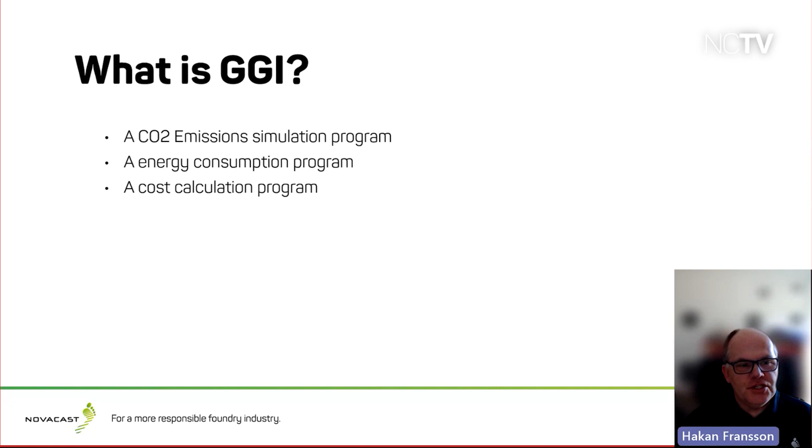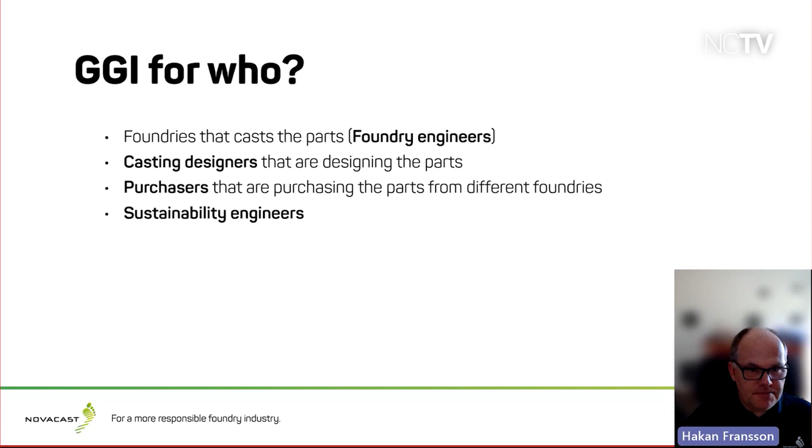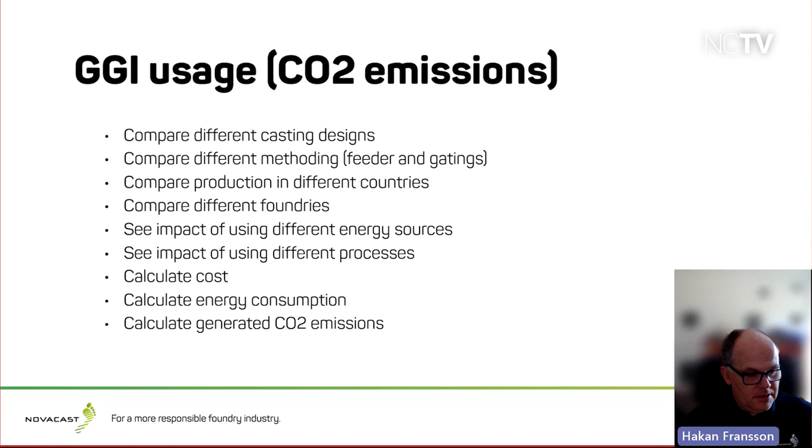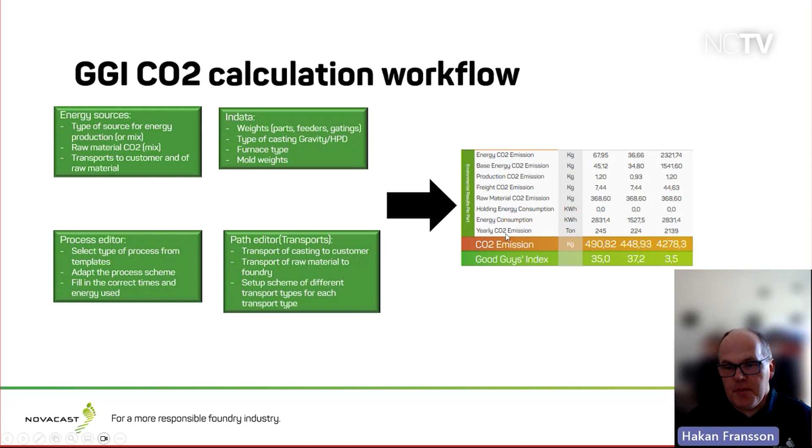And here you have then what comes out - this is the result, in short. You get out the energy CO2 emissions, you get out the energy consumption, and you get the summarized CO2 emissions, and then you can start comparing different types of foundries and so on.

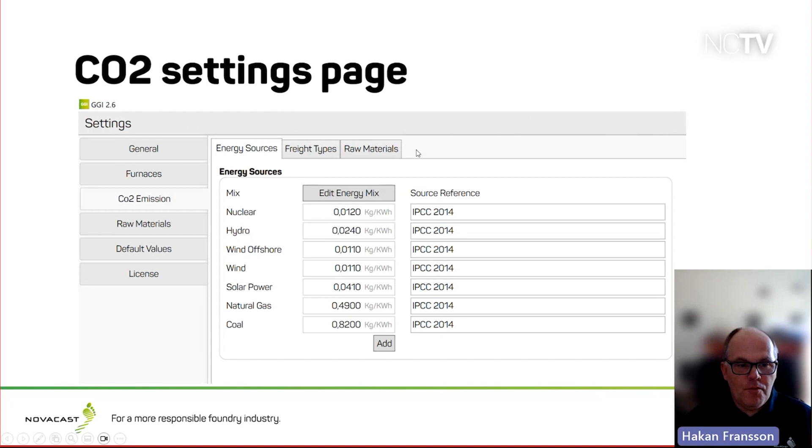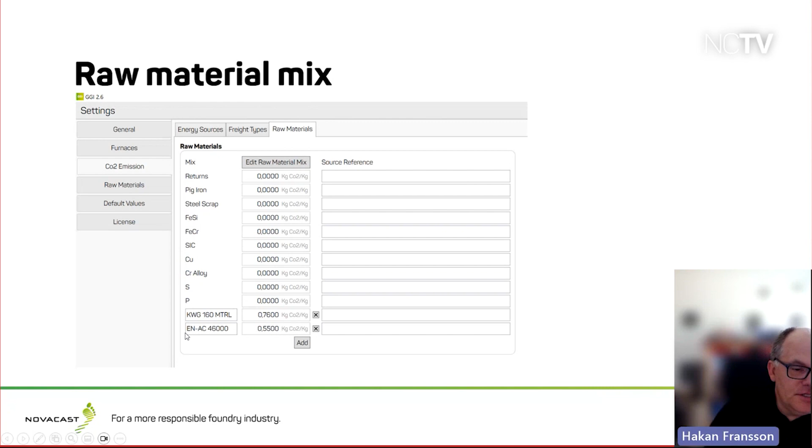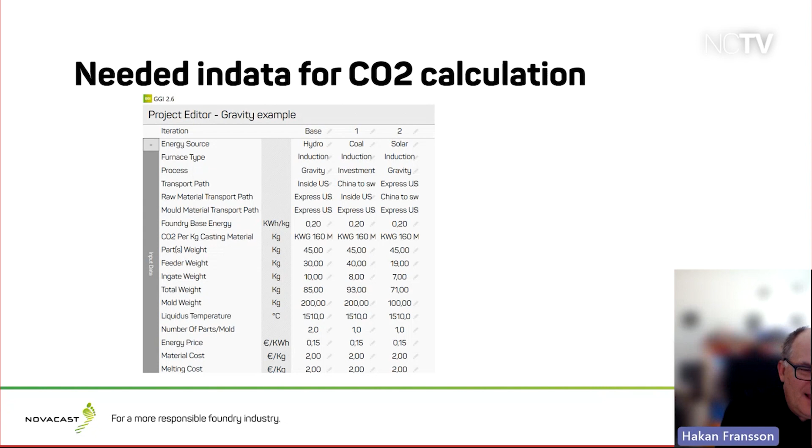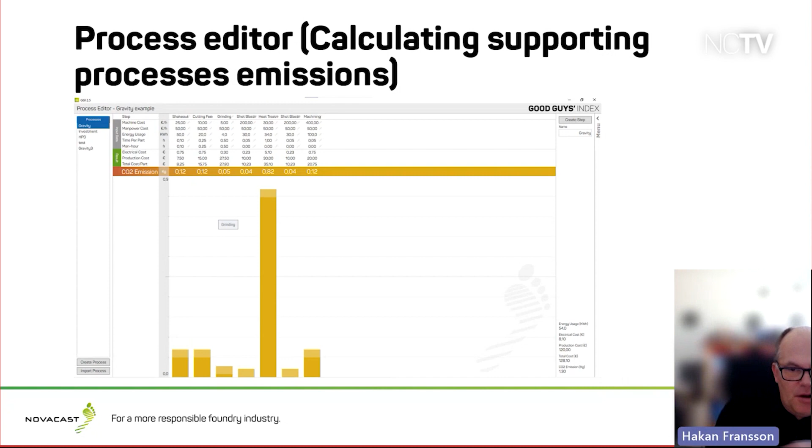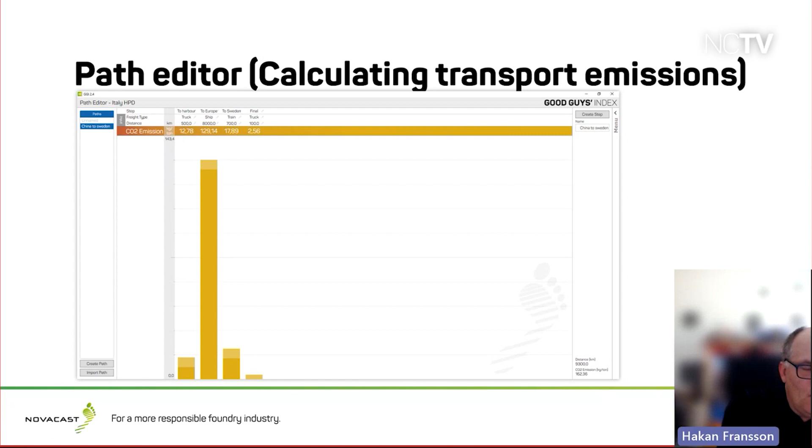And then we have the path editor, where we are looking at the calculation of the transports. This one is for the surrounding processes, and we get CO2 emissions from this, CO2 emissions from the transport, and CO2 emissions from the melting, where you are using a lot of energy.

And also the raw material is one big thing, which is purchased but should be counted in somewhere. So here we have the results, where we have also included the total cost savings and so on. We also can compare, so when we are setting up a base, we can compare with others, and then we get the deviation between them on energy savings and cost savings.

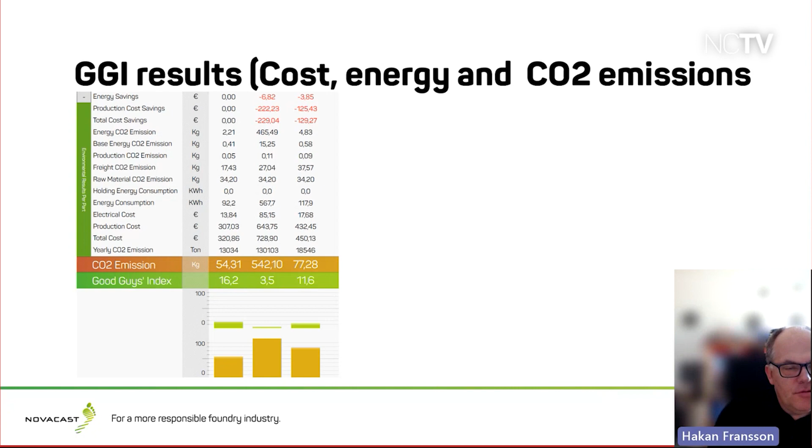And you can see directly how much you have in CO2 emissions, which is a really interesting thing. We also have a value called the Good Guys Index, a number that we have created that maybe in the future will be something to count on, but for the moment we are focusing on the CO2 emissions.

Out come the results, and then you have to select one of the iterations - we had 3 - so we select, for example, the base, and then we can see this divided into upstream, core, and downstream. Upstream is before the foundry, like raw material. Core is at the foundry, and downstream is transport in this case.

And here you can see also that we have divided the casting CO2 emissions into kilogram CO2 per kilogram, so it is not summarized any longer. This means you get a comparable number. For example, you can see that our average is 1.3, but in this case we got 1.49. Here we have some room for improvement, for example.

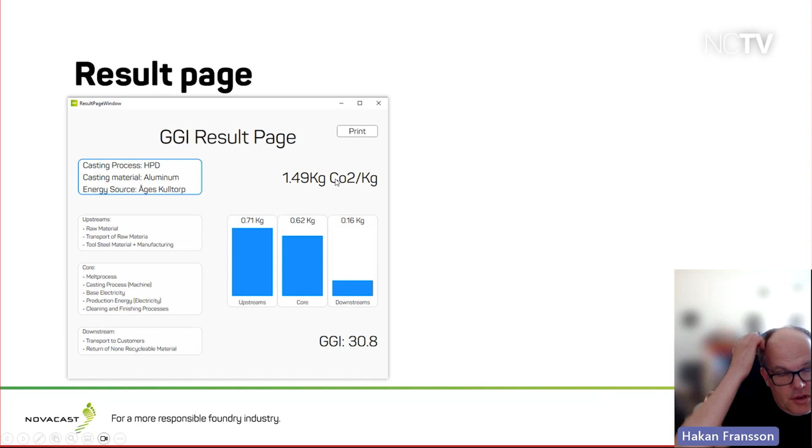Or you can use this to calculate your average and so on, and then you can see if you can lower the average for the whole foundry. So this is the result page.

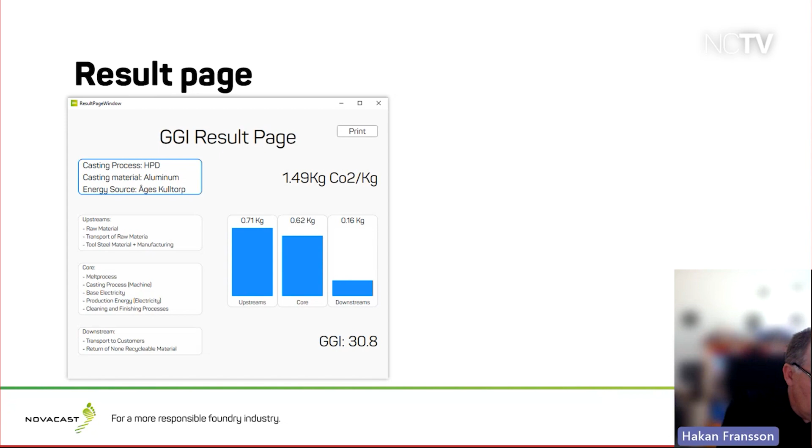We also have an auto report with and without cost calculation. You can actually turn off the cost calculation completely in the software and not focus on that, so that is very easy. So here we have the CO2 emissions summarized then.

So we get the CO2 emission from the melting process, the casting process, the casting machine and so on surrounding that, the finishing process, purchased electricity, raw material transport, and transport of the casting to the customer - that's downstream. And here you can see how we are divided into different tasks: core, upstream, and downstream.

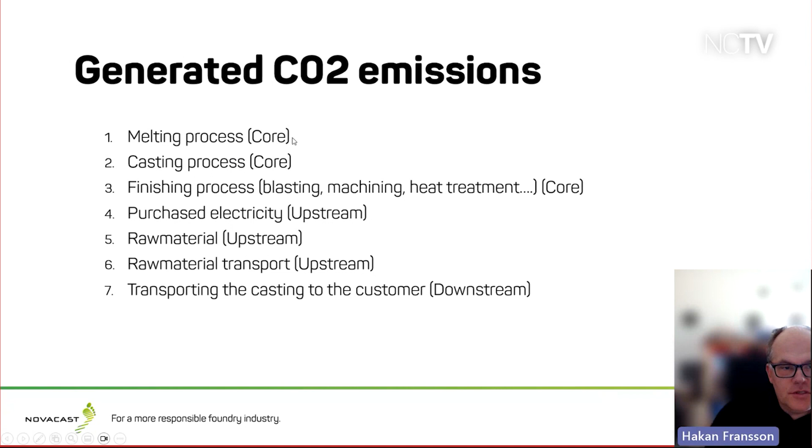In the use of the program, purchasing companies can compare different suppliers, which is very, very good for the purchasing company. Purchasing companies can also include this in a life cycle analysis, and they can ask a foundry, if it has this kind of program, to actually deliver the figures for the casting.

And the foundries can use the program to improve their production. Foundries can also use the program to improve a certain product and measure or calculate a certain product. And of course, this could be a part of an LCA, a complete life cycle analysis.

So a little bit about the source references. We have taken the CO2 emissions for energy from IPCC 2014. We have the energy consumption from different furnaces taken from the Swedish Foundry Association. And the transport CO2 emissions come from a report from the UK government. So that is also what we have put in here.

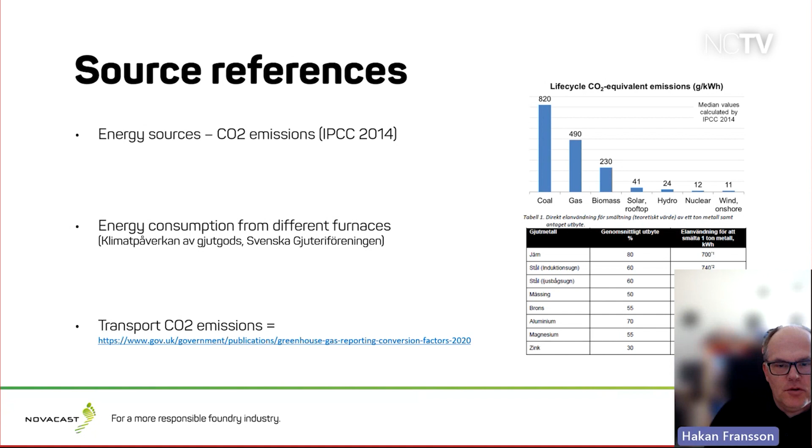But you might know, if you are working a little bit in this area, that there could be different figures on the market. So I think you have to select one route and then use that. It should, of course, not be different figures, but it still is, I would say.

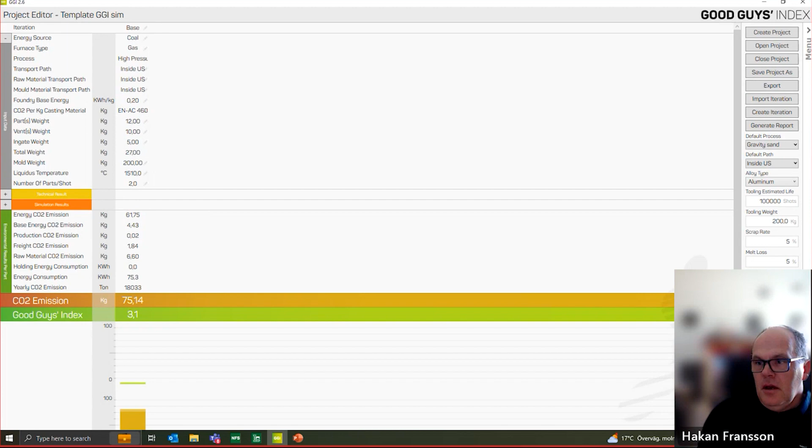If we go first to the settings page, we can see that we can switch the program between HPD and gravity. It's a little bit of how we are setting up different things. I mean, like naming and so on.

We have a language section. We have a number of languages that we are supporting. And we have also possibility to work in metric or in imperial standards, so to say. We can also import default values, export default values and so on, so you can use it on another program or another computer. We have the furnaces.

So this is the different furnaces, and you can add your own. So this is 2 added furnaces here.

We have CO2 emissions here. So this is the energy source. We have the freight types. There are just 4 right now, but you can add more quite easily.

And we have the raw materials. And here you can see that we have actually some values of different things here. And you can, of course, go to a mixing here, and then you can put in how much parts that should be in each of them here. So it's quite easily possible to make new variants or combinations that you have at the foundry.

We have also another part that it's called the raw materials, and that is the mold material. So here you can put in the right value for the mold material, kilogram CO2 per kilo, or the sleeves or the filters. And we have also default values side where you can set up your default values.

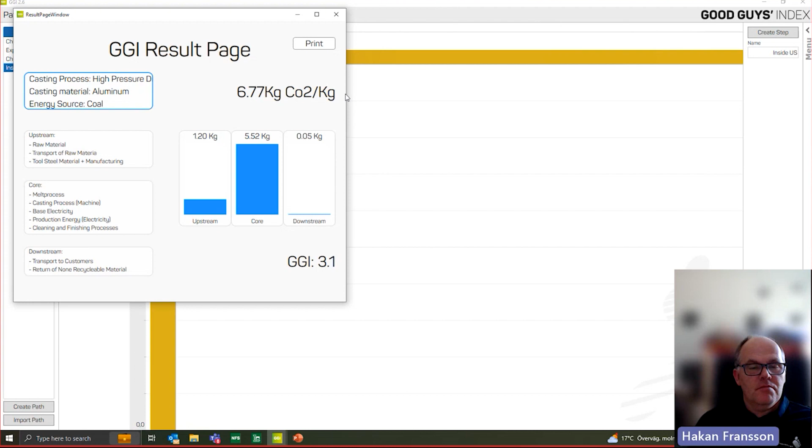You also have the result page, which is for the base normally. And here you have, as I said, the upstream, core, and downstream. In this case, it was 6.77 kilogram CO2 per kilo.

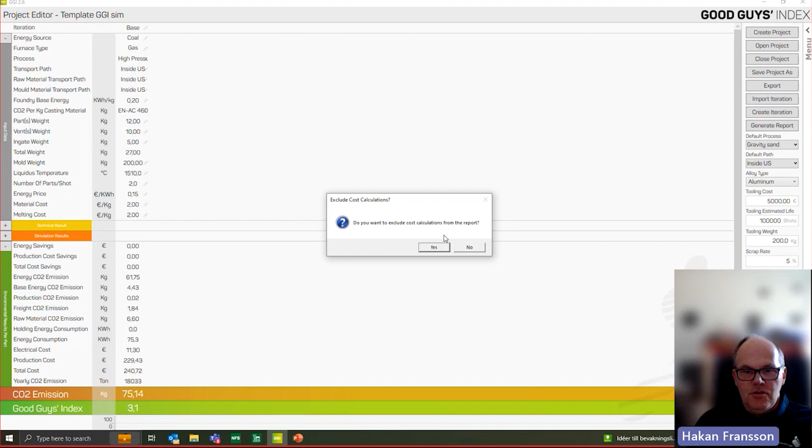If we go to the main page, there are some other things maybe to mention here. We can export the data as an Excel file. We can generate a report, as I said, and it's a one-click method - you just select if you want to exclude, and then select where you would like to put it. Then you have a PDF file with all the data, and it's quite comprehensive, I would say. It's a very nice report.

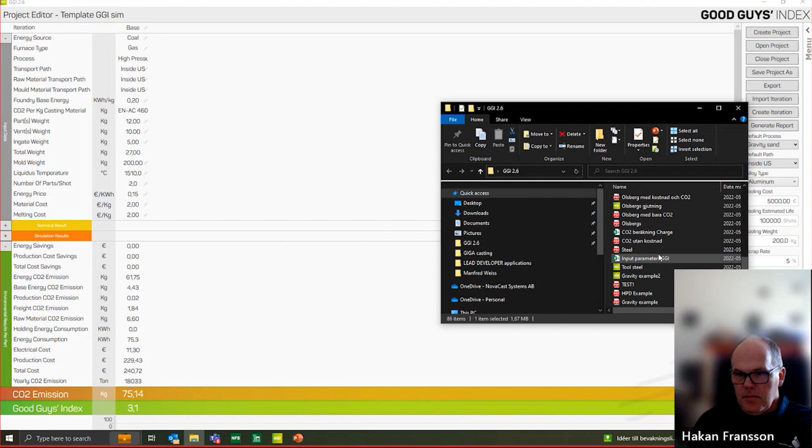Maybe I have some suggestions. Let's see if I have a report here. Should be a report somewhere, I hope. This is probably a report here, yeah.

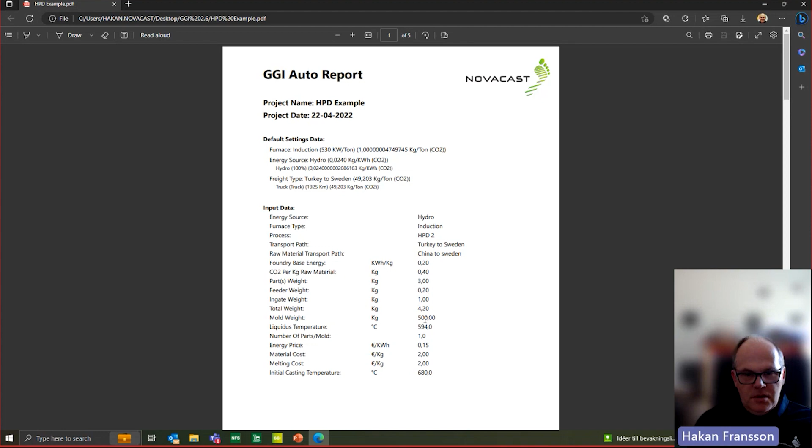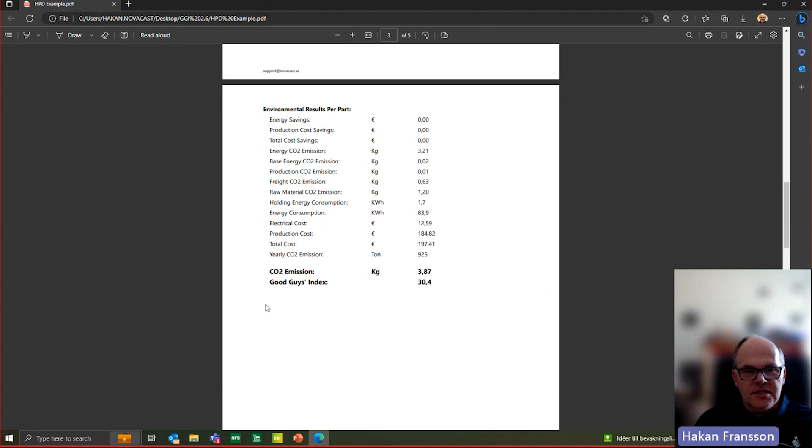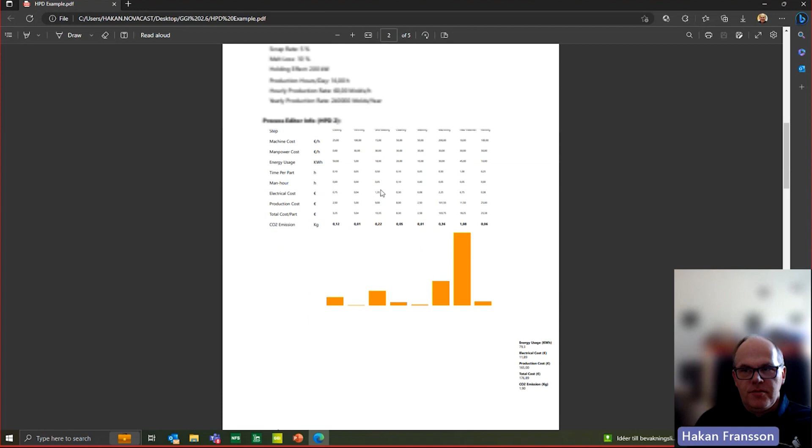So here's a GGI auto report, where you have the name of your project, date, default settings data, input data, all the things you put in, a little bit more input data, the process editor, all the data for that, calculated and so on. Also the environmental results, so all the results come out here. You have the result page, and you also get source references. So it's a quite nice standardized report, that is good to have.

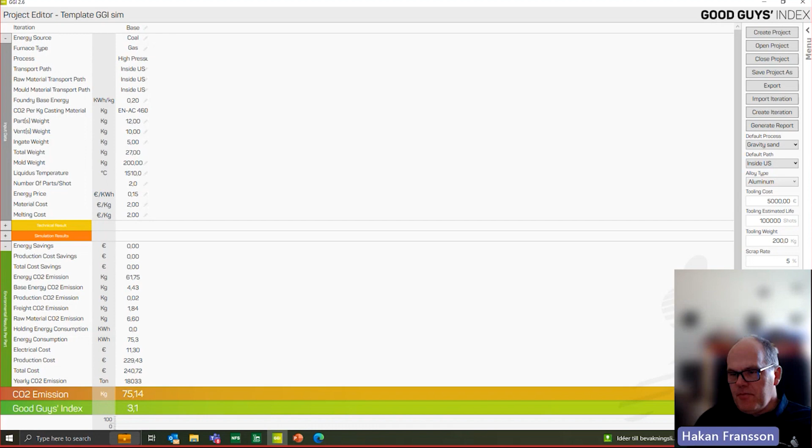And then also on this side, you have a little bit of default settings. You can set up default process to use, default path, and so on, and also alloy type. You also have the possibility for tooling cost, tooling estimated life, tooling weight and so on, and also the scrap rates. But this is data that you can use as default values and don't have to change for every iteration.

There are also some technical data that comes in if you are using this - calculated data from the weights here, for example casting yield and so on. And you have also got some simulation results data here.

So finally, Håkan, the customers who are interested in the program GGI, how should they proceed?